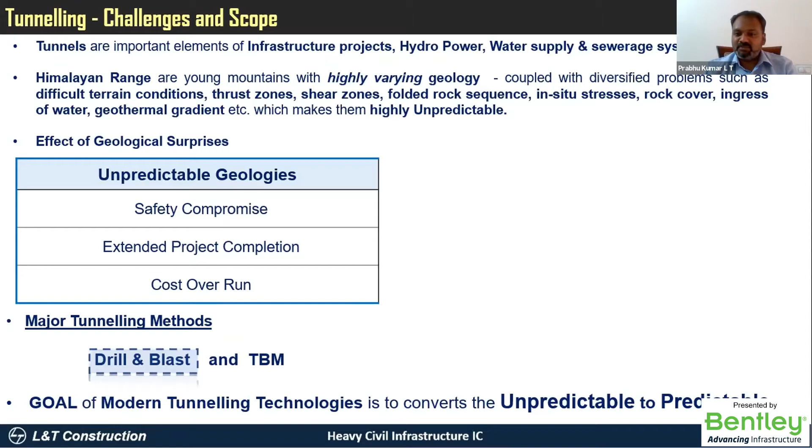On tunneling, though there are two types - drill and blast, and TBM - we are focusing mostly on drill and blast, which we are doing here. The challenge here is to make the unpredictable predictable. With that note, these are the topics I'll be covering today: survey, drill jumbos usage, explosives, shotcrete machines, deformation monitoring, geological predictions, and digitalization.

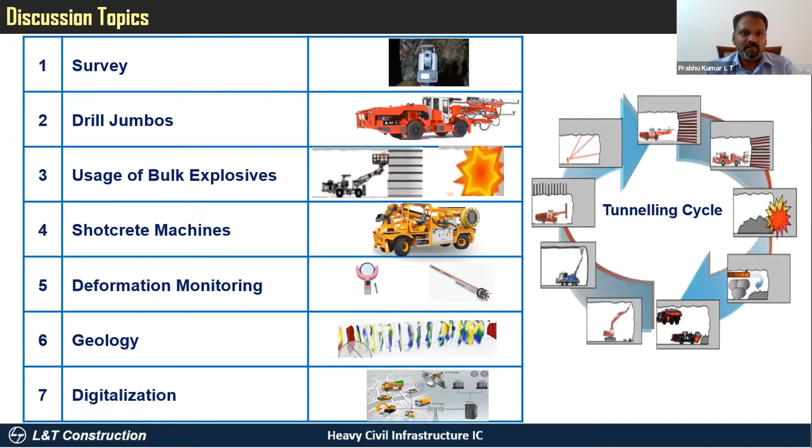The first topic is on surveying. The challenge earlier was that we were using a total station where the real-time profile of the structures was not available immediately for us to decide whether the formation is okay or whether there is undercut or overbreak. Similarly, when we spray shotcrete, to understand whether the shotcrete thickness is excess or less, we were not getting clarity, which was creating a lot of issues when we had to go back to office, plot the sections in AutoCAD or some software to see whether the profile is okay, then go back to site and execute the same thing.

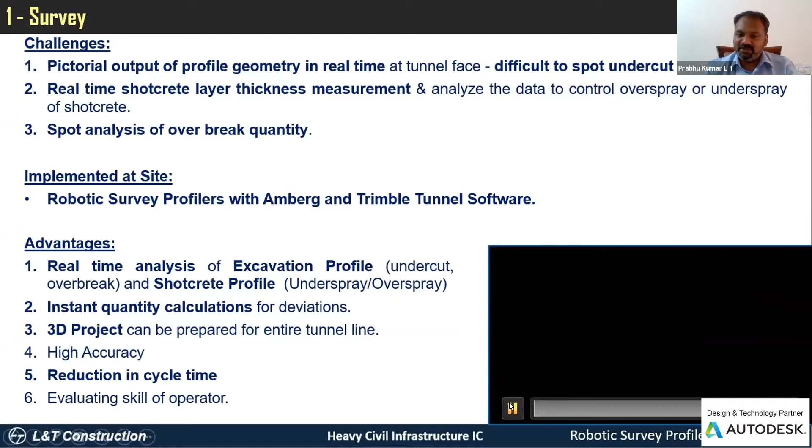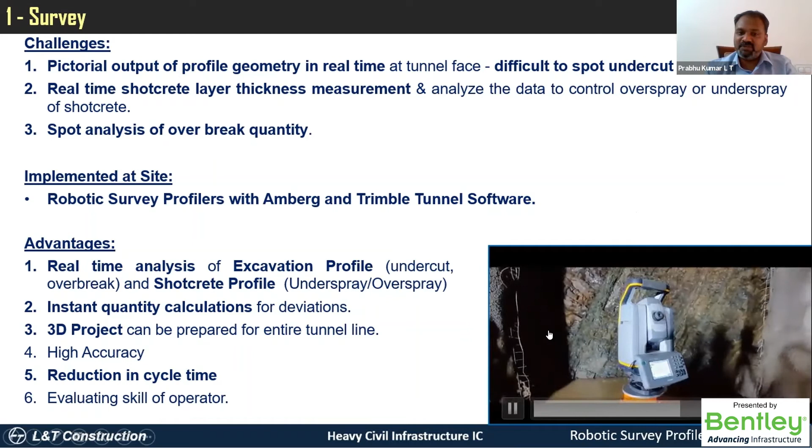So here, what we had implemented is robotic survey profilers with Amberg as well as Trimble softwares, where the real-time profile can be immediately taken at site. I'll just replay the video which is coming on the side of the screen. You see that the profiler works automatically, taking readings at every 1 meter chainage, and immediately after the survey, it gives the profile in the machine itself.

You can see here the profile, and wherever the red dot is, that means there's undercut; where there's a blue dot, it's fine. With this, immediately we can see what is the profile of the structure, and whatever corrective action has to be taken can be taken immediately at site. This increases the accuracy of the works, and also reduces the cycle time where we have to go back to the office, check the things, and come back and execute again.

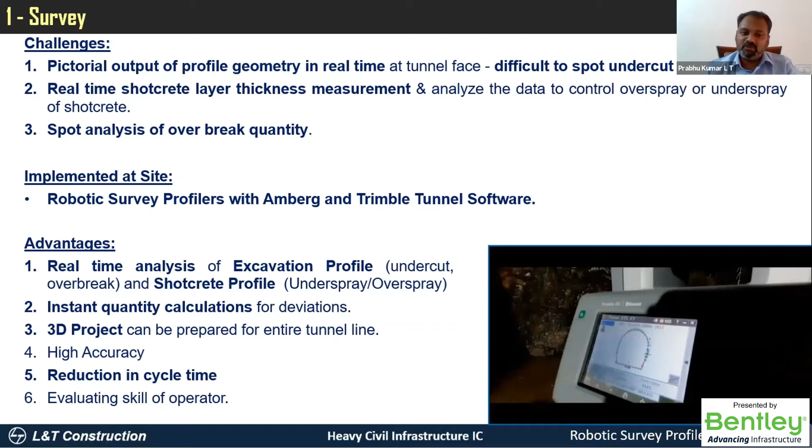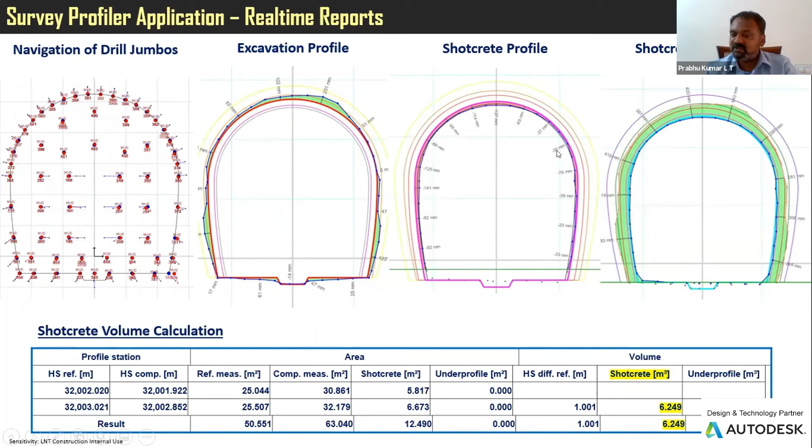To speed up the works, sometimes we spray the shotcrete on the undercut profile, which then becomes a major complication during the next stage of work - the lining - which we have to implement. These are the profiles we get from the tunnel profilers: the excavated profile, then the shotcrete profile, then the shotcrete thickness profile where you can see whether we have sprayed excess or not. It is visible here - 27 mm, 37 mm. It gives an exact reading, and it gives a volume also. Quantities are also available here.

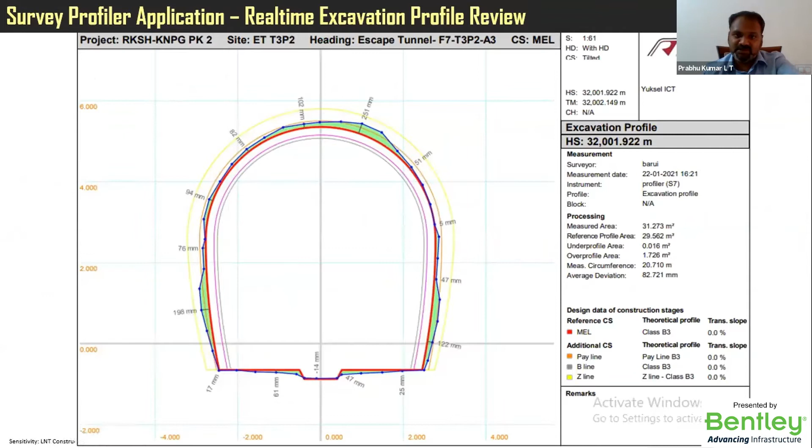And these are the detailed sections where you can see the excavation overcut has gone in some locations and undercut in some locations. Similar to the shotcrete profile which I had shown you, and the final volume of shotcrete done.

Going to the next topic of automatic drill jumbos, where earlier the quality was dependent only on the operator's skill to operate the machine, whether he is doing it in the right angle, right direction, number of holes, and other things.

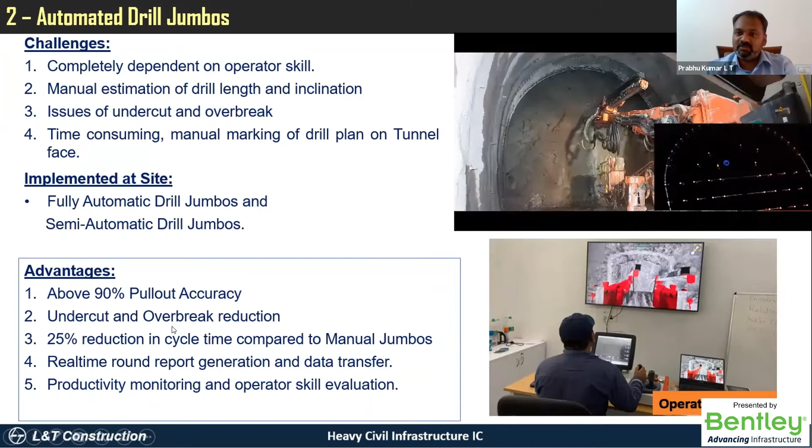So with that, we had implemented fully automatic drill jumbos, where it does the drilling automatically, which you can see in the video. It increases accuracy, reduces overbreaks and undercut, and reduces cycle time. It gives real-time data on this.

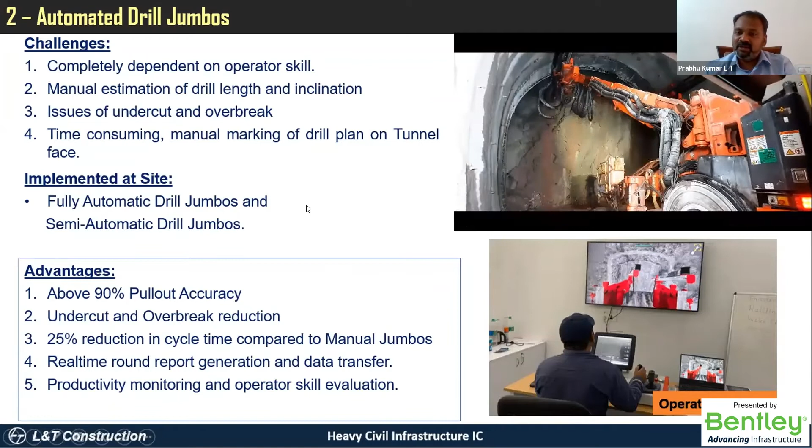In the bottom screen, you can see there is a simulated training which we had implemented, where the operators are trained with simulators before using the machine, so they get a better exposure of the machine beforehand.

I'm going to the next slide, where the machine gives all the inputs, ready-made. It's a Wi-Fi enabled machine, so you can connect and operate it, input the data, and extract the data from the office itself.

It gives the efficiency of the drill, how the drilling has been done, what is the drill done per each boom, and all these details. And machine parameters give a pull-out analysis, how your face is, what is the length of drill done at each location. It gives a detailed analysis.

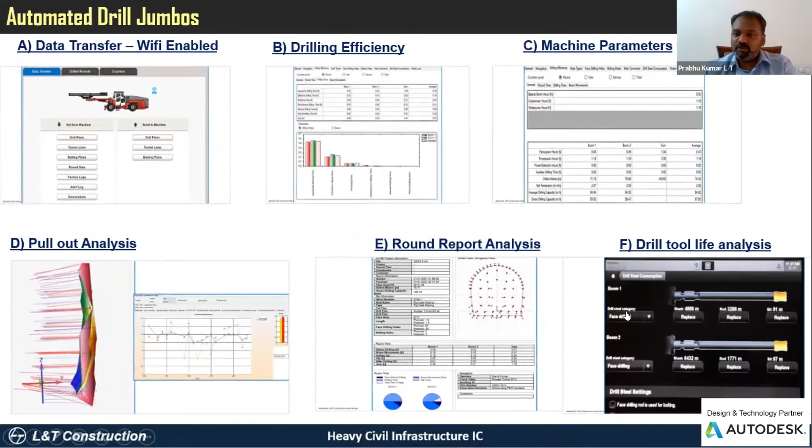Similarly, there is a round report, and it can give the life of the tools being used also. What is the life of shank, rod, bits, everything is available.

With that, I'll go to the next topic, usage of bulk explosives. Earlier, we were using cartridge explosives. Now we are getting it changed to bulk explosives, where it is very safe.

The cycle time reduces because the loading of the explosives is done by automated equipment, which is shown on the right side of the screen. And it is comparatively very safe compared to package explosives.

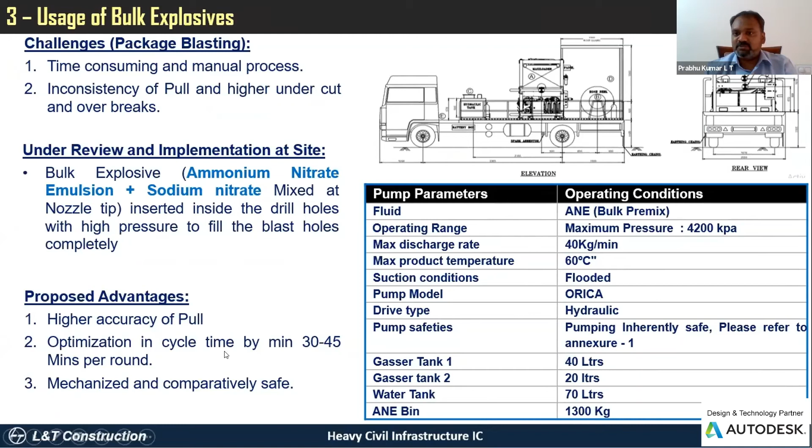The next one is the shotcrete machines. Again, earlier we used to have manual machines where the thickness of the spray, the quality of the spray, all depended on the operator.

But now we have implemented automatic robotic shotcrete machines, which have real-time data. The right side of the screen shows the real-time data.

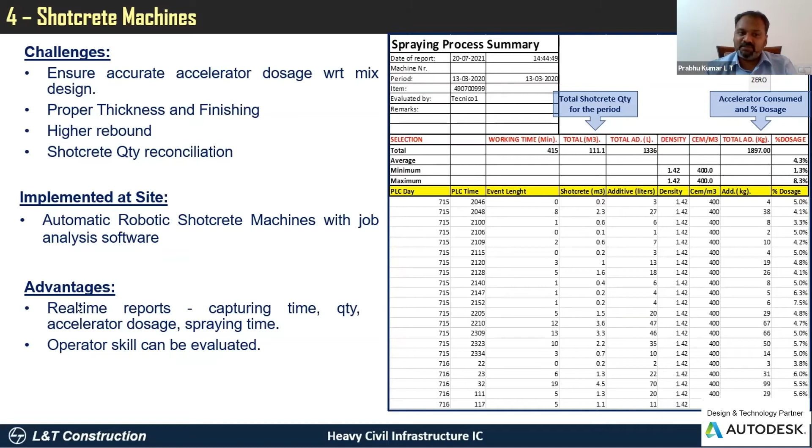It gives very detailed data of the time, event, the quantity of shotcrete sprayed, how much accelerator dosage has been used. Everything is available instantly from the machine. So here the operator's skill also can be evaluated.

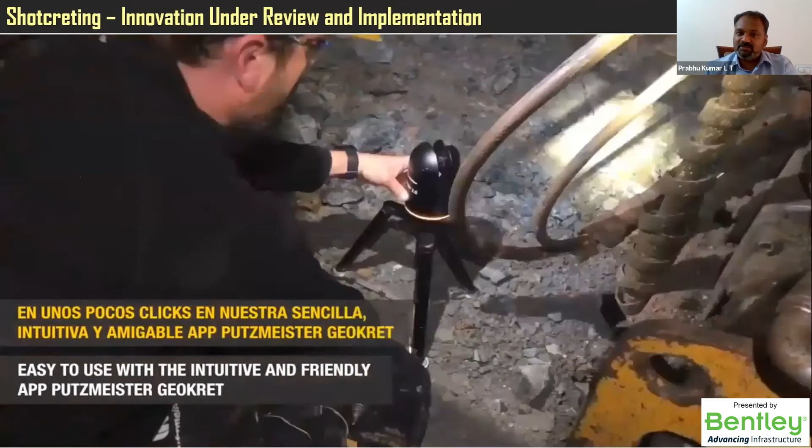And as a next step, we are trying to implement this one. This is a laser scanner where it scans the surface and tells you immediately where the shotcrete is oversprayed or undersprayed, so that it gives real-time data to the operator.

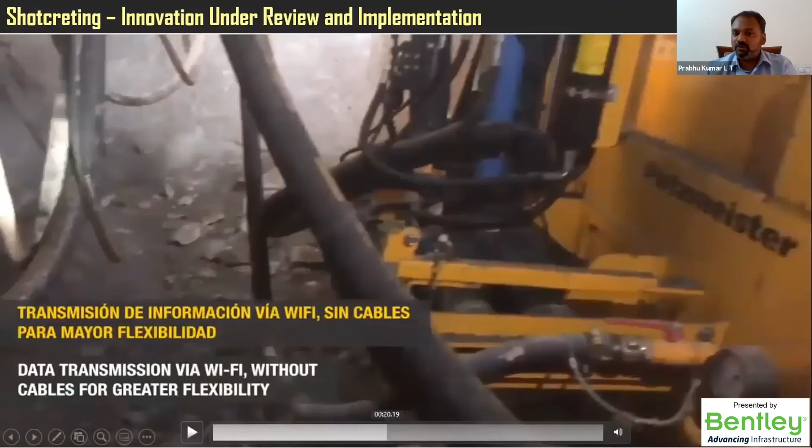So you can see here after the laser scanning, where it is undersprayed or oversprayed. Different colors represent different thicknesses.

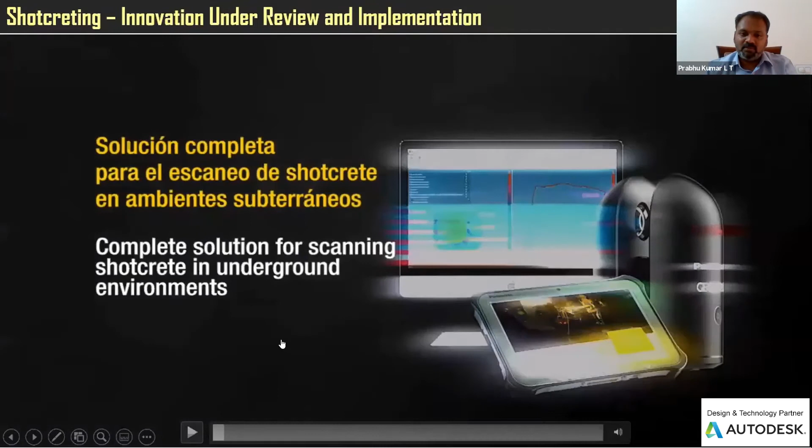Going forward, next is deformation monitoring. This is a proper NATM technology which we are using. Hence, we are monitoring all the deformations through MPBX, load cells, and bi-reflex targets, which give the exact deformation going on in the surfaces as well as the load coming on the bolts.

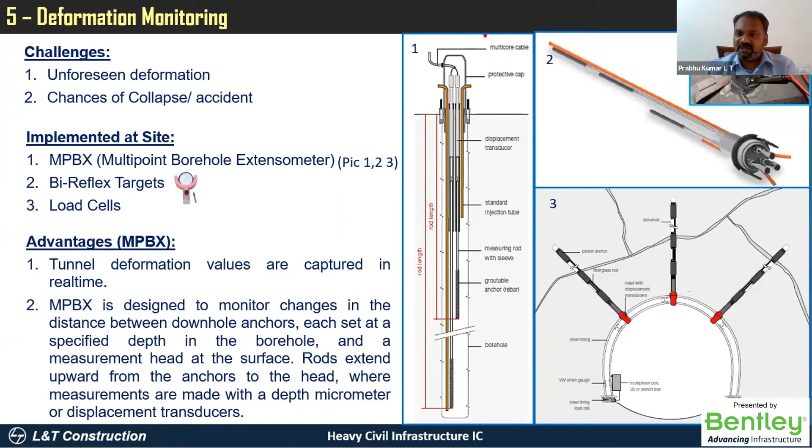We can plot a graph with this and say what is the deformation in mm accuracy. In certain locations, you can see in the graph that the targets have shown a deformation of 5 mm, 10 mm, and even up to 15 mm.

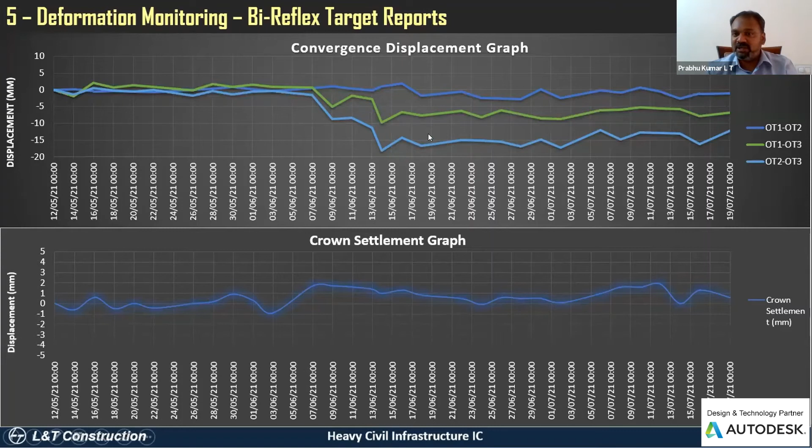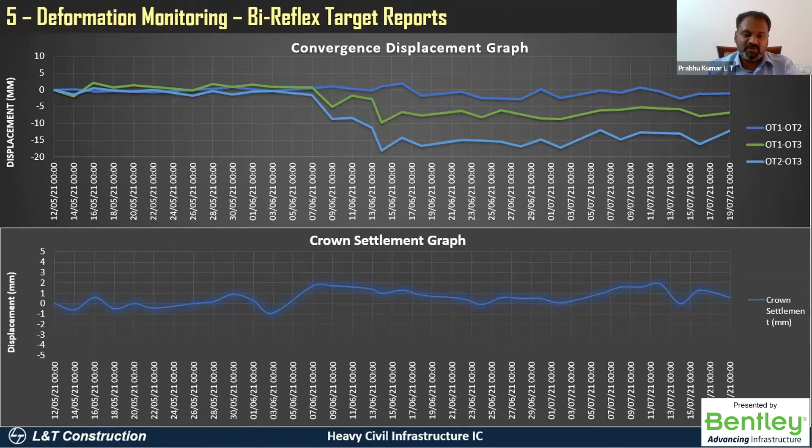And this is the crown settlement graph at the bottom, which shows how much the crown is converging. This gives a fair idea of the supports being adopted by us, whether it is sufficient, or we are lagging something, or we are overdoing it, so we can optimize the supports.

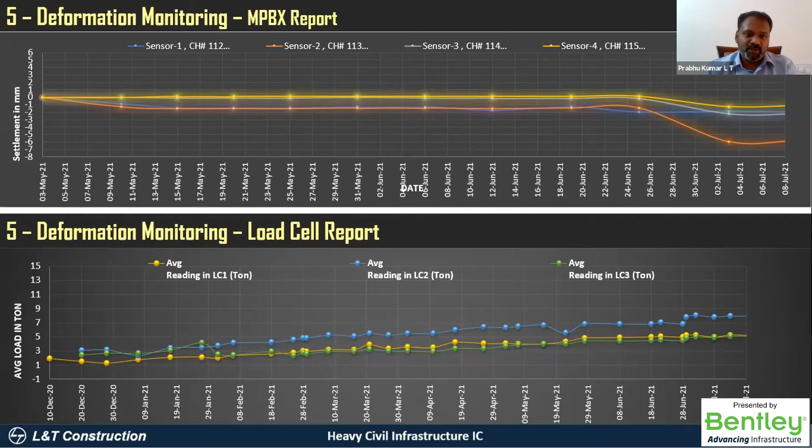These are some reports of the multi-point borehole extensometer. And the bottom one is the load cell, showing the load coming on the rock bolts, how much is coming. Though it's designed for 23 tons, you're getting a maximum load of 8 tons on the bolt, which is on the safer side and can be further optimized.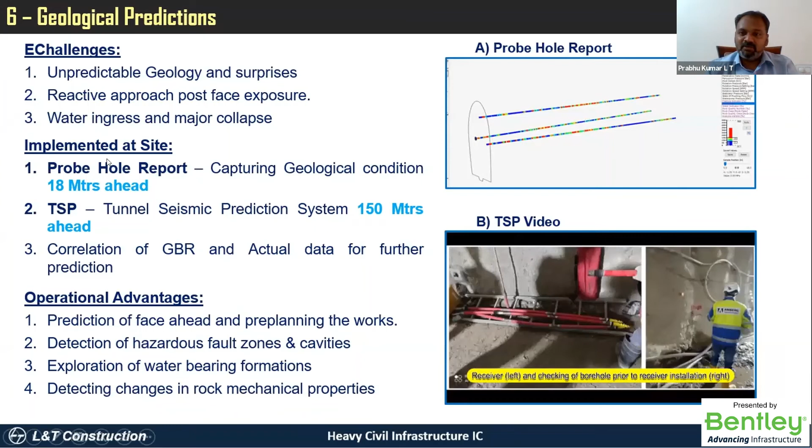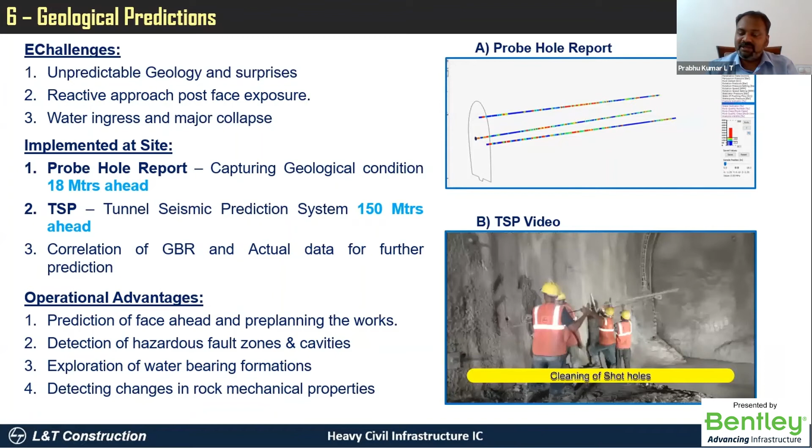We drill ahead of the face, and we can see the geology here in the top right photograph. You can see the different colors, which show the different rock strengths available in the 18 meters ahead, giving a clear idea of what geology we are going to encounter ahead, so we can proceed forward.

Tunnel seismic prediction is the latest technology where we can predict the face up to 150 meters ahead, giving a clear idea of the geology being encountered and water pockets available. This gives a great intervention in helping us have a safe working platform where we can predict the geology ahead and take corrective or preventive actions before taking up the works.

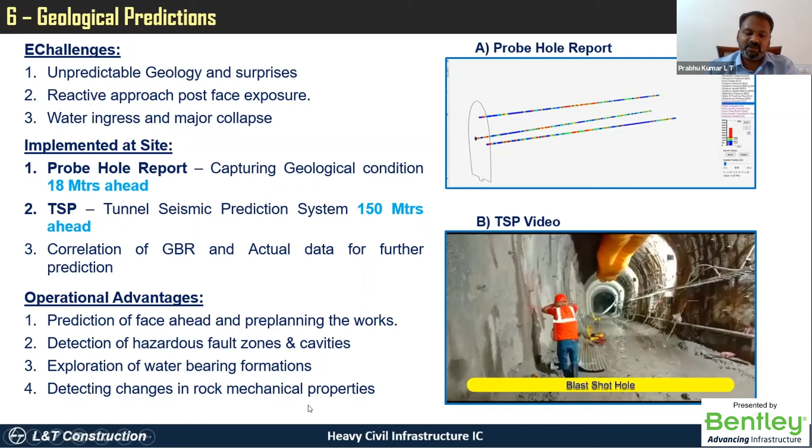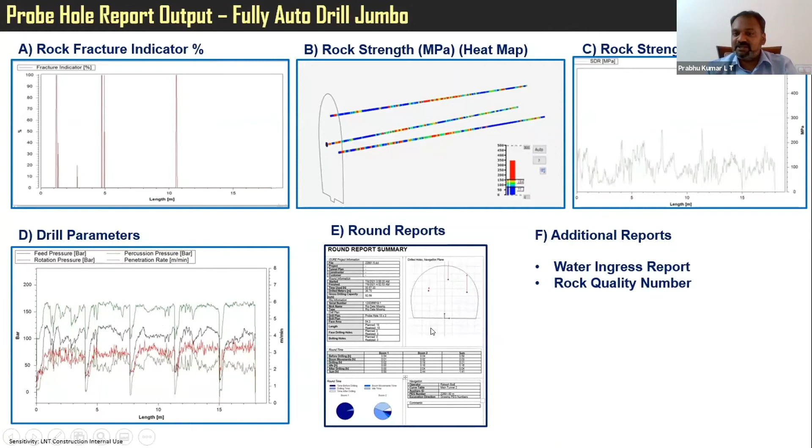These are certain reports which come out from the machine on the rock fracture indicator - how much the rock is fractured, what is the strength of the rock, what are the drill parameters, and what is the round report data, which gives exact details of the rock ahead. This is a pull-out report where, if you have done 15 meters of tunneling, it shows how the blast has progressed and how the face has been behaving. The different colors have different geological interpretations.

Coming to the final part, it is on digitalization. Apart from the technologies used in the machines, we had implemented certain other things.

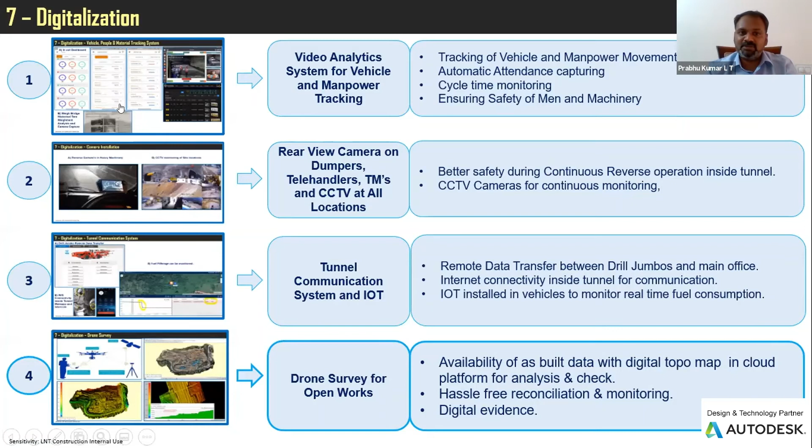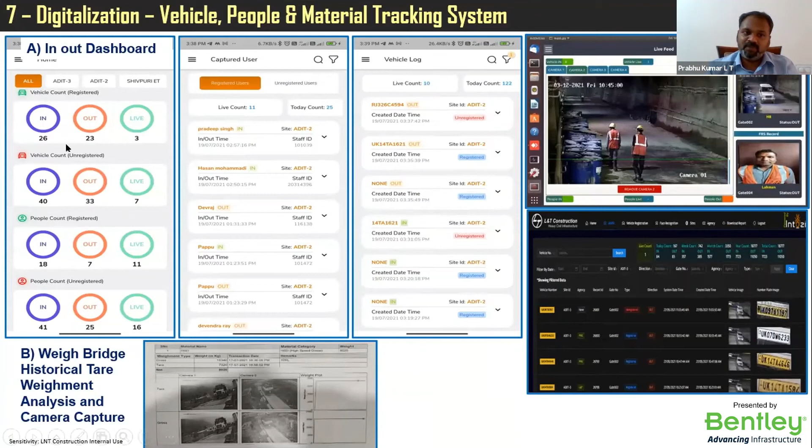We implemented video analytics with a video camera which records the person and gives details of who has entered the tunnel and come out, even for equipment. On the bottom right screen, vehicles entering the tunnel are captured automatically, and we can pre-feed the data of the numbers into the machine. So it gives exactly what equipment it is and what time it entered and left, and a dashboard of the persons available inside the tunnel - who went in, what time, when they came out - everything is available.

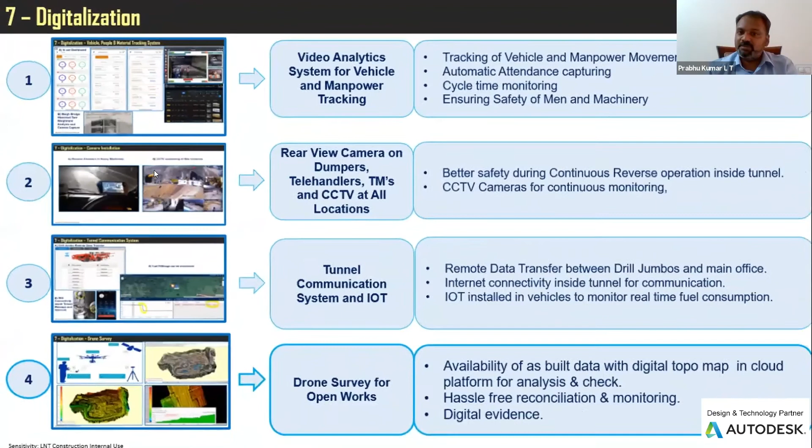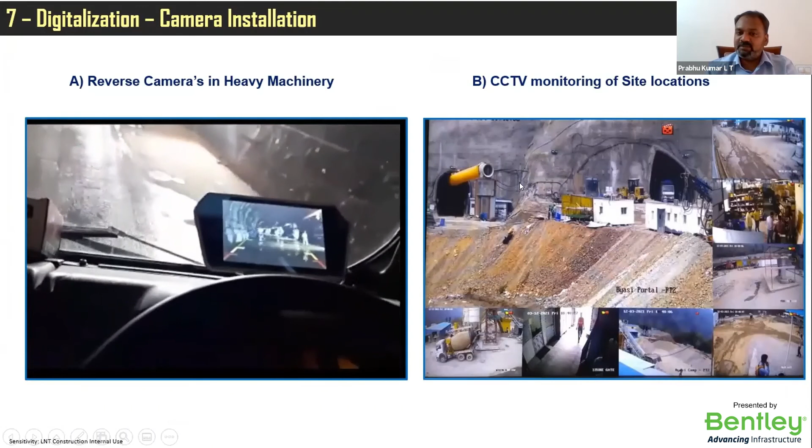Next is on the cameras. For the dumpers and transit mixers, we had fixed reverse cameras. Since the tunnel is small - one of the tunnels is an escape tunnel in our railway project, only 5 meters diameter, too small for any vehicle to turn - the vehicle has to go in the front and come out in reverse. So we fixed reverse cameras to help the operator make a safe operation. The right side shows the CCTV cameras, which are fixed and monitored at all levels.

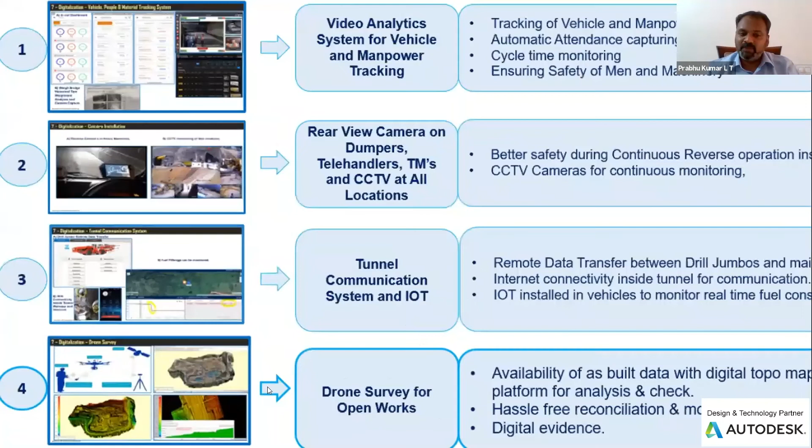Next is the tunnel communication system - this may be the special thing we did. We installed Wi-Fi and IoT inside the tunnel, bringing data and signal into the tunnel. We introduced a mobile app, like an intercom, but accessible even underground, which is a great way for communication.

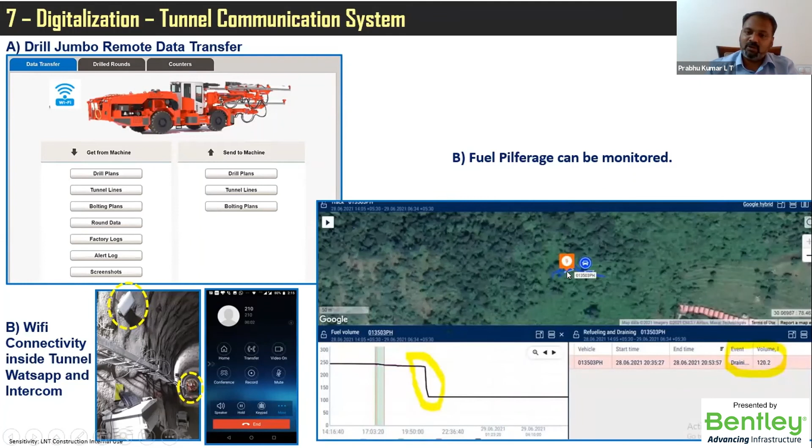On the right are the fuel sensors and IoT we installed in the machines, where you can see a sudden drop, meaning somebody has removed fuel from the machine. It shows a 120 liter drop in fuel at a particular instant, meaning there is theft going on. The location graph also shows where the theft happened, and correlating it with CCTV footage, you can clearly say where the mistake is happening.

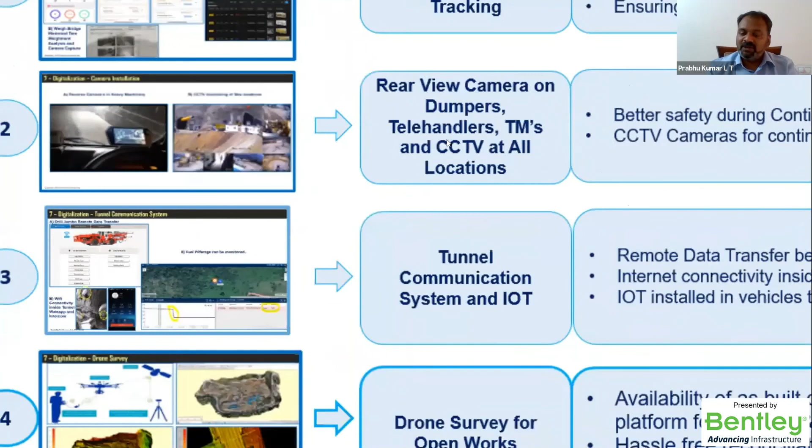And the drone surveys - this is another technology we implemented full-fledged. The right top photo is our site photograph at Reasi railway station. We are doing a drone survey and getting the exact cut-fill quantities of the works executed, which saves a lot of time, is a much faster approach, and is effective in giving accuracy of quantities too.

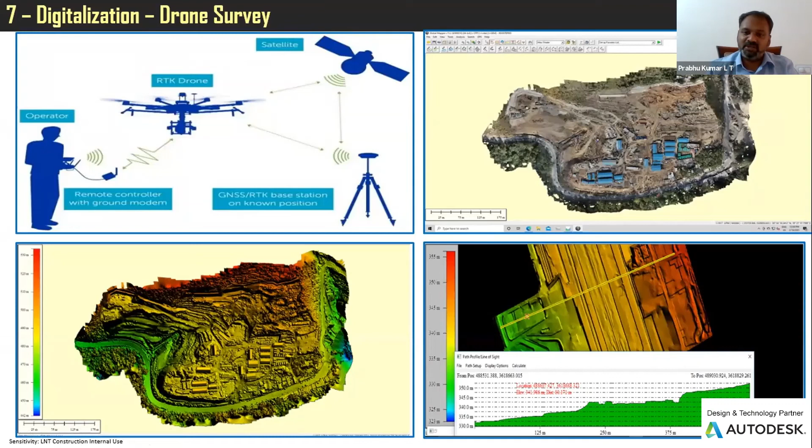What are the things we are going to achieve by doing all this? First is the safety part, giving us a much better, safe, predictable working environment where we can take precautions before taking up something challenging. For project completion time, it gives a better understanding of the geology ahead so we can plan and proceed with the works accordingly. Using automated drilling equipment and operated machines, there's a lot of savings in cycle time, a minimum of 5 to 25% savings.

On cost overrun, the life of the bits increases and the overbreak reduces. In a tunnel project, if you reduce 1% of the overbreak, it contributes maybe 1.5 to 2% of your margin. So if you save even 3 to 4% of overbreak, it contributes to 5 to 6% cost savings.

So finally, we would like to conclude by saying that predicting the unpredictable is the essence of underground work, and that is what we are trying to implement in our project, and we are doing it successfully.